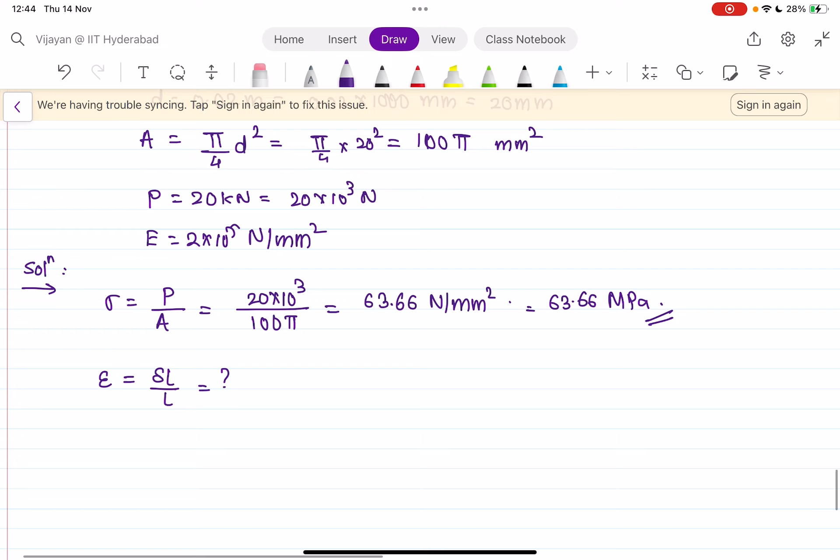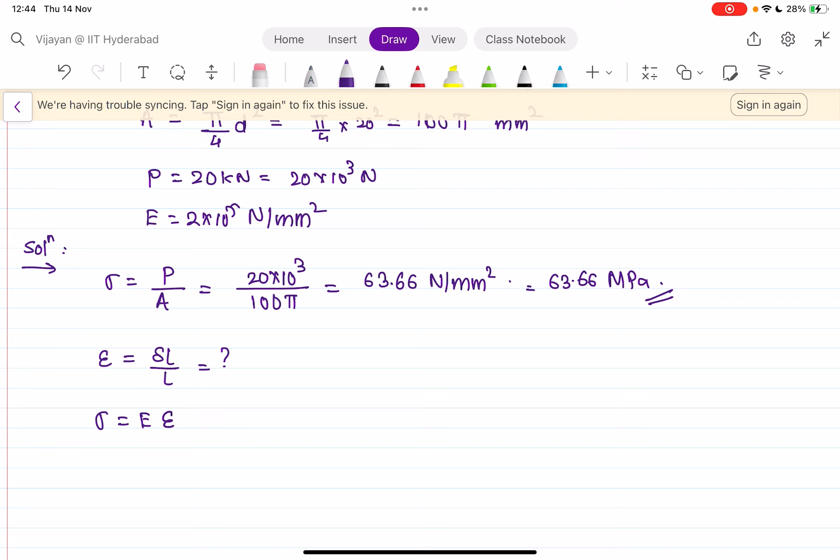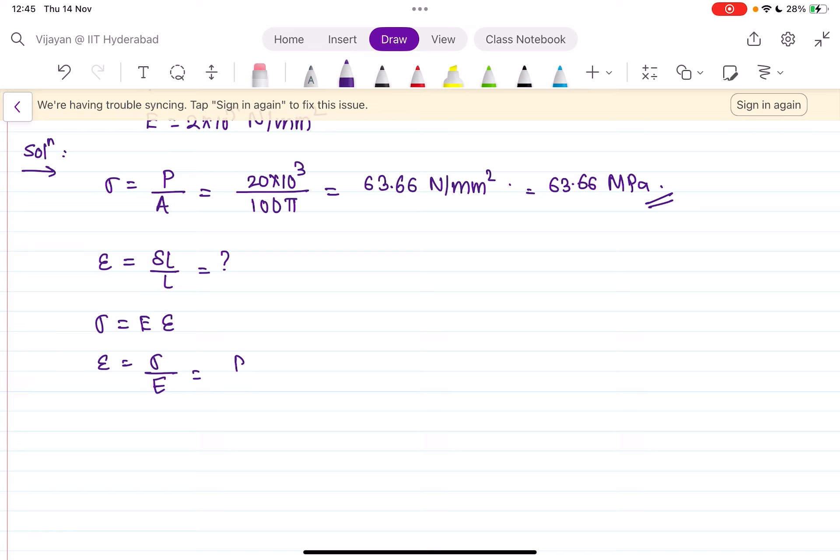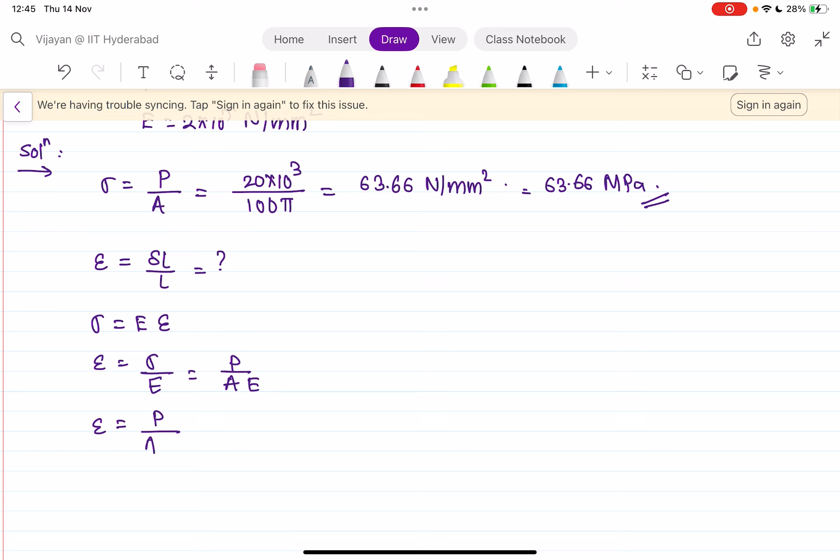So how can we find out change in length? We know, see, stress is equal to modulus of elasticity into strain. From here we derive the formula for delta L and remember it. What is your strain? Strain is nothing but sigma, that is stress, by modulus of elasticity. What is stress? Axial force upon area, and your E. Okay, so that means strain is nothing but P upon AE. Strain can be written as delta L upon L, that is equal to P by AE.

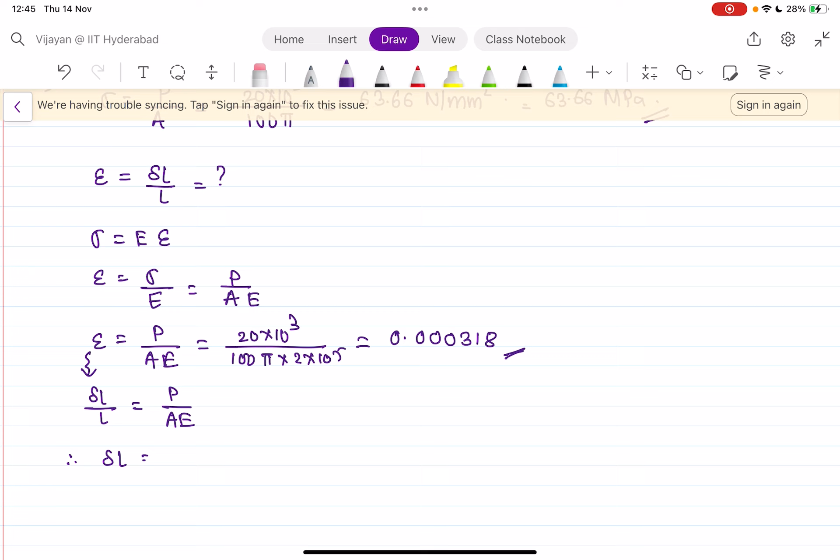From here you can find strain, that is 20 × 10³ upon 100 pi into 2 × 10⁵, and you'll get the answer as 0.000318. Strain will not have any unit, because it is nothing but length upon length. So to get the formula for delta L, we write strain as delta L upon L, change in length upon original length. So therefore delta L is equal to PL upon AE. This formula is very important; remember it as a standard formula.

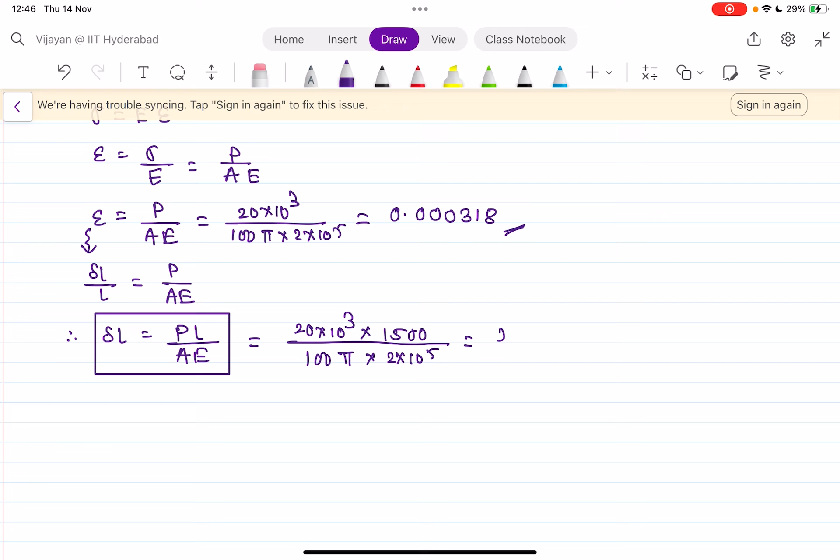So what is P? 20 × 10³ into L, which was 1.5 meter, that is 1500 mm, upon area 100 pi into E, 2 × 10⁵. If you solve this, you should get the answer as 0.478 mm. So that is your answer. That was question 1.

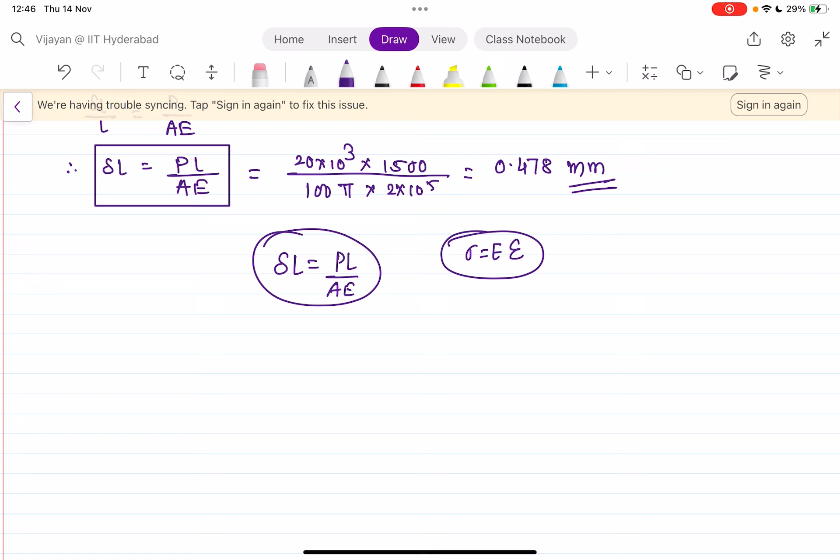So what did you learn here? Just the application: delta L is equal to PL upon AE. If you don't remember how it came, you know that stress is directly proportional to strain, therefore stress is equal to modulus of elasticity into strain. From this formula we can derive it. Okay, let us go on to the next problem, question number 2.

Find the minimum diameter of steel bar which is used to carry a load of 4000 Newton if the stress in the bar should not exceed 95 Newton per mm square.

Okay, so what is given? You can read the question again. Find the minimum diameter of steel bar which is used to carry a load of 4000 Newton. So P is given: P is 4000 Newton. Then the stress in the bar does not exceed 95 Newton per mm square.

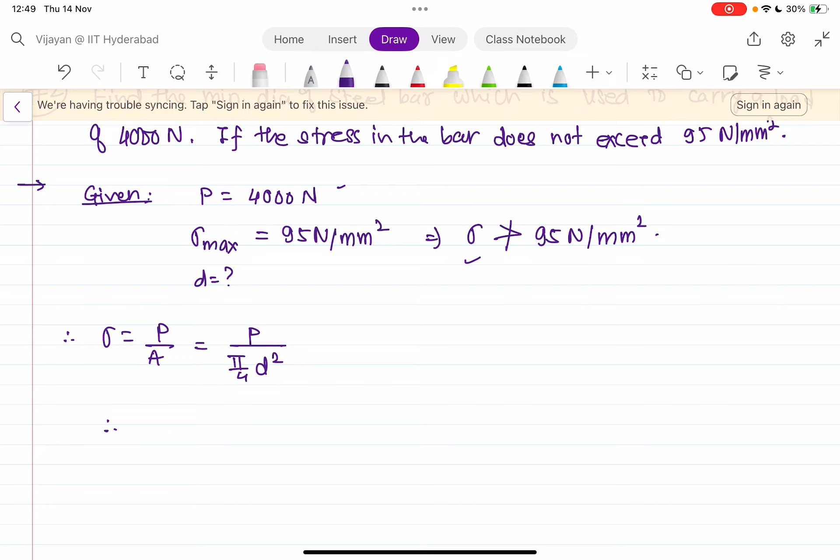So d square, we can write that d square is equal to P by pi by 4 into sigma, right? So we can write this as 4P upon pi into sigma. P is 4000 Newton upon pi into the maximum stress allowed, 95. Therefore if you solve this, you will get d square is equal to 53.61. Therefore d is equal to under root of 53.61, which is 7.32 mm.

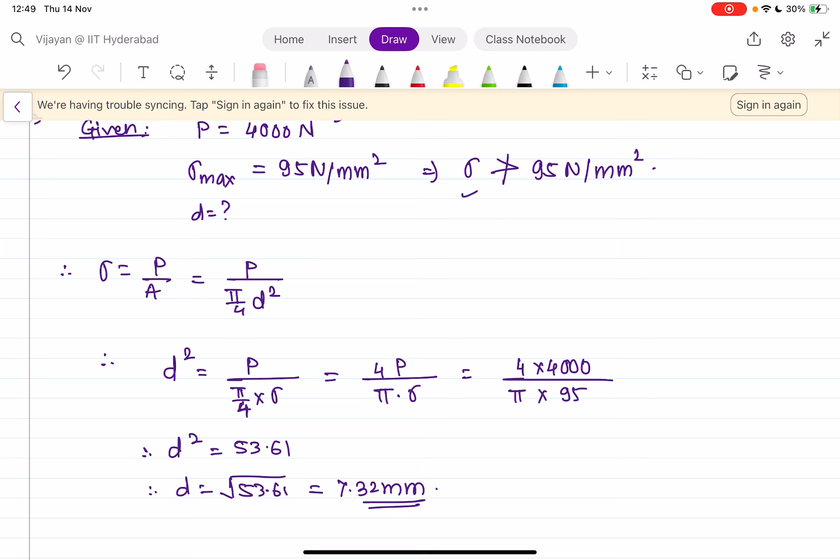Okay, so this should be your minimum diameter so the stress does not exceed 95 Newton per mm square. Let us go to a third example.

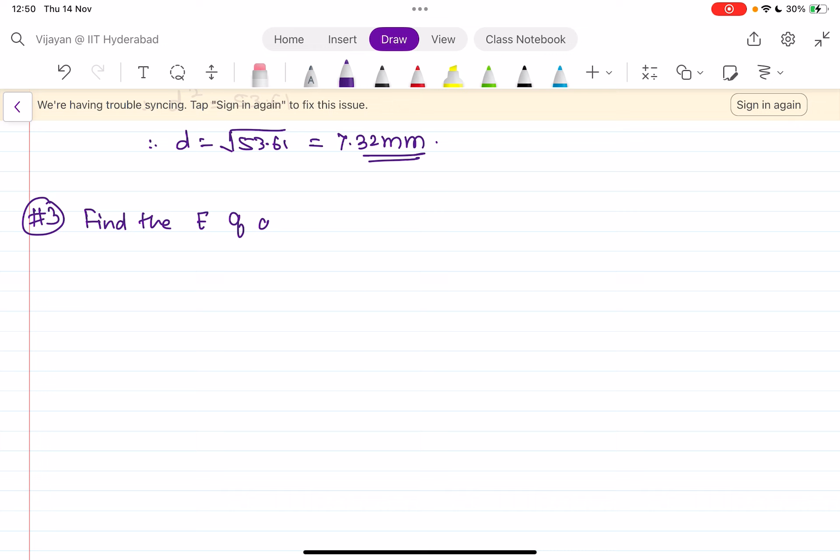Find the Young's modulus E of a brass rod of length 250 mm and diameter 25 mm, which is subjected to a tensile load of 50 kilonewton when the extension of rod is 0.3 mm. So what is your given data?

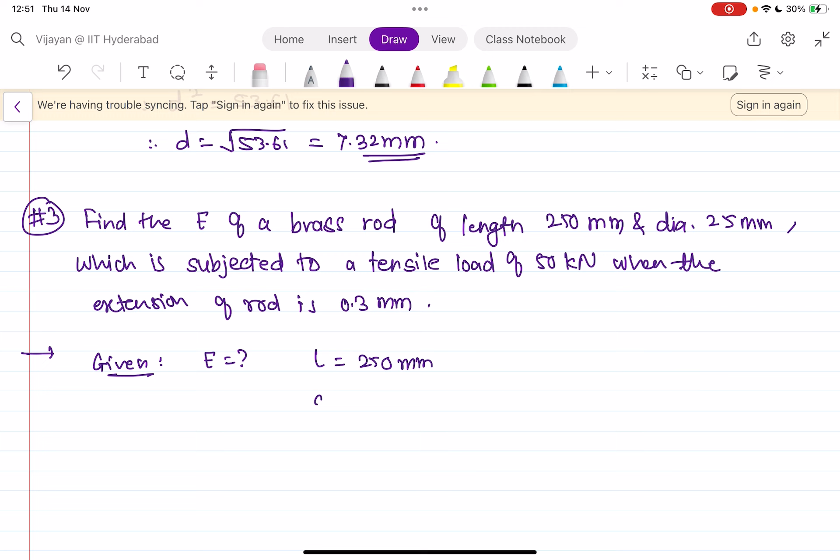Again it revolves around the same things. We have to find E. Given length is equal to 250 mm and the diameter of the bar is 25 mm. The tensile load, that is P, is equal to 50 kilonewton, and the extension, that is delta L, is 0.3 mm. So what you can find from this is area.

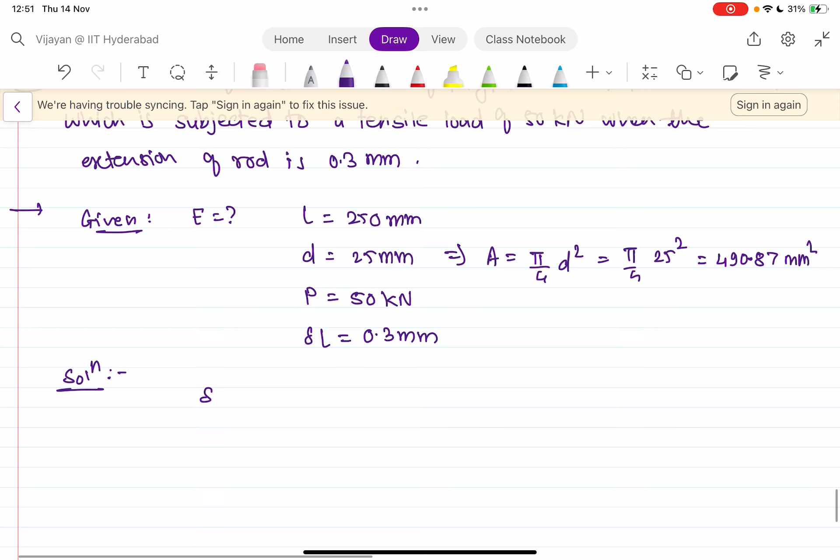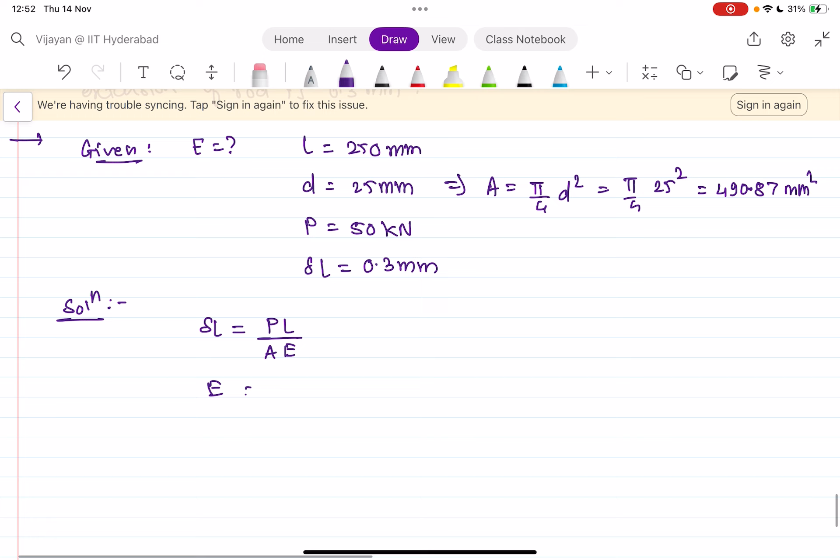Area is pi by 4 d square, because it is a brass rod, a circular rod. So pi by 4 into 25 square, which is 490.87 mm square. Now you can solve it. The formula for delta L is PL upon AE. We want to find E. E is nothing but PL upon A into delta L.

So P is 50 into 10 to the power 3. L is equal to 250 mm. Everything should be in newtons and mm. Area is 490.87 into delta L, 0.3 mm. If you solve this one, you should get 84882.64 Newton per mm square.

Now you can write it as 84.882 into 10 to the power 3 Newton per mm square. This is Newton per mm square. If I multiply by 10 to the power minus 6 in the denominator, this becomes meter square, and this is Newton. So the 6 goes up, plus 3, that is 9.

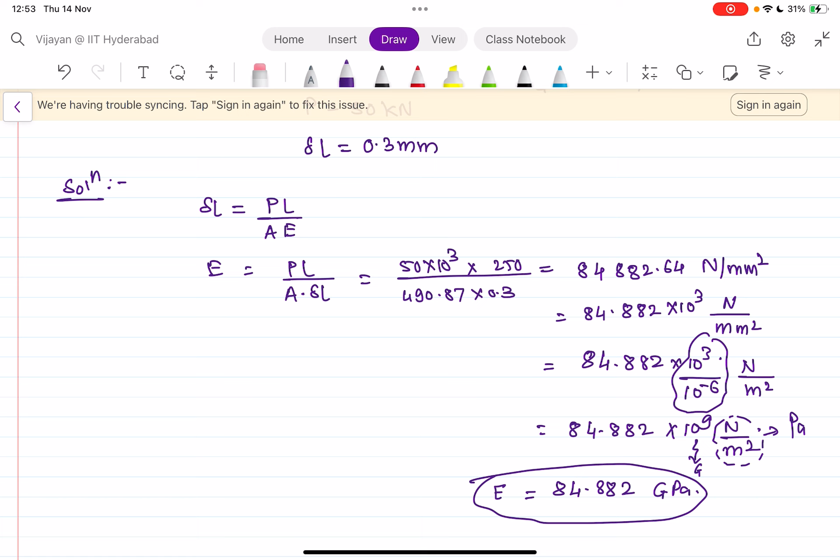So 84.882 into 10 to the power 9 Newton per meter square, and Newton per meter square is Pascal. 10 to the power 9 means giga, so E is 84.882 gigapascals. Okay, let us move on to our fourth problem quickly.

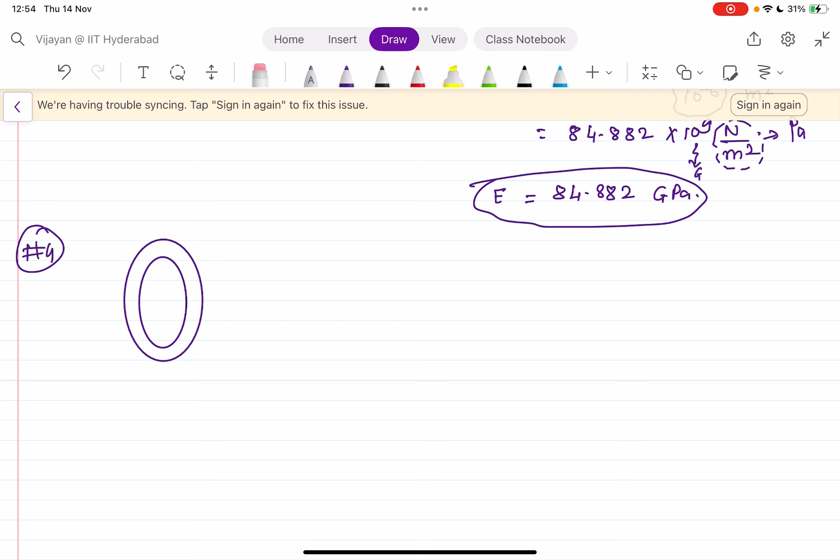So there is a section which looks something like this. Okay, and this is the one side we are seeing. This is a rod, this is a hollow section. You can say it is a pipe like section.

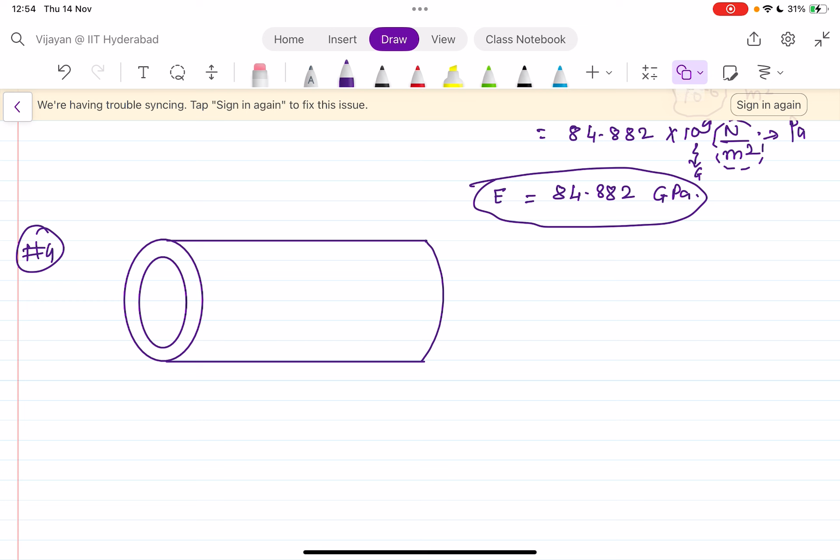It is a pipe-like section. Okay, what is happening on this? We are applying some force P from both the sides, a tensile force P, which is equal to 1.9 meganewton. What is meganewton? It is 10 to the power 6 newton. That means 1.9 into 10 to the power 6 newton.

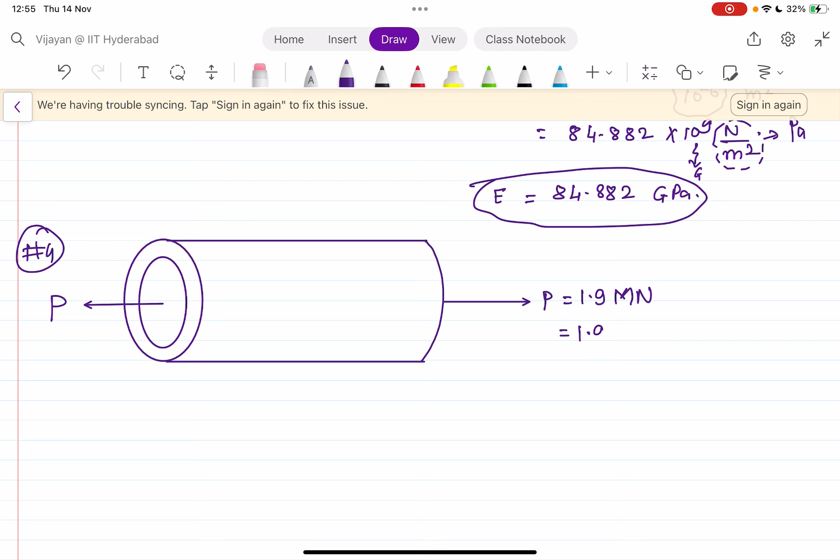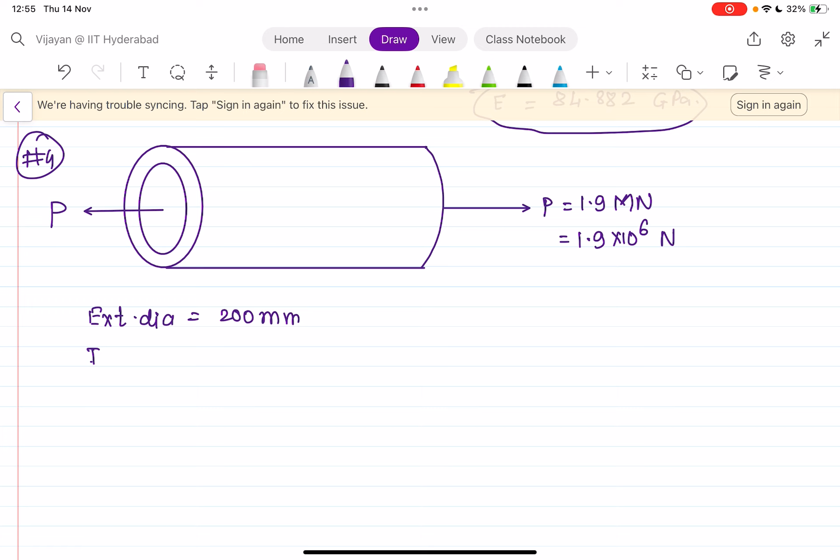Nothing else. What is the external diameter? The external diameter is 200 mm. What is the internal diameter? Internal diameter is what we have to find. Okay, and they have given that the working stress for this bar, that is sigma, is 120 newton per mm square, and so what we have to find is the d.

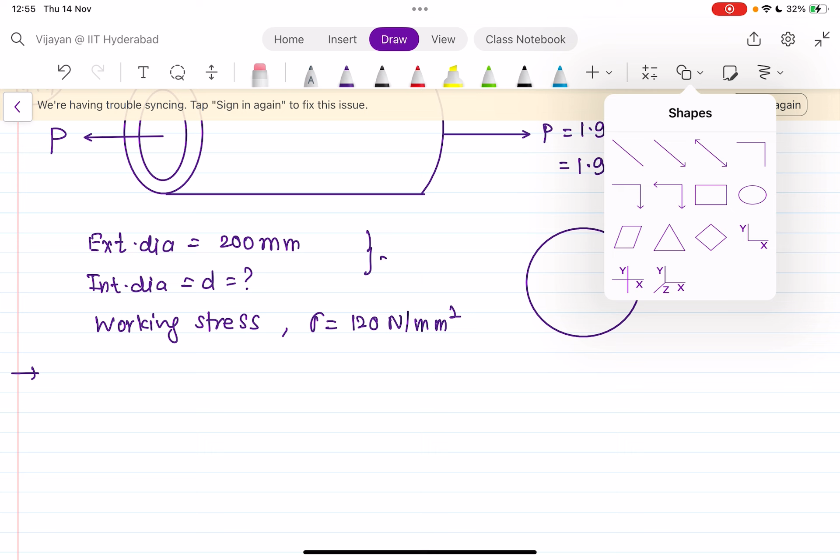Okay, so the stress they have given. So what will be the area of this hollow section? Let me draw the cross section here. If your cross section looks something like this, and this is your outer diameter, that is capital D, and your inner diameter, let us call it small d. So what will be the area? The area will be equal to pi by 4 into external diameter square minus internal diameter square.

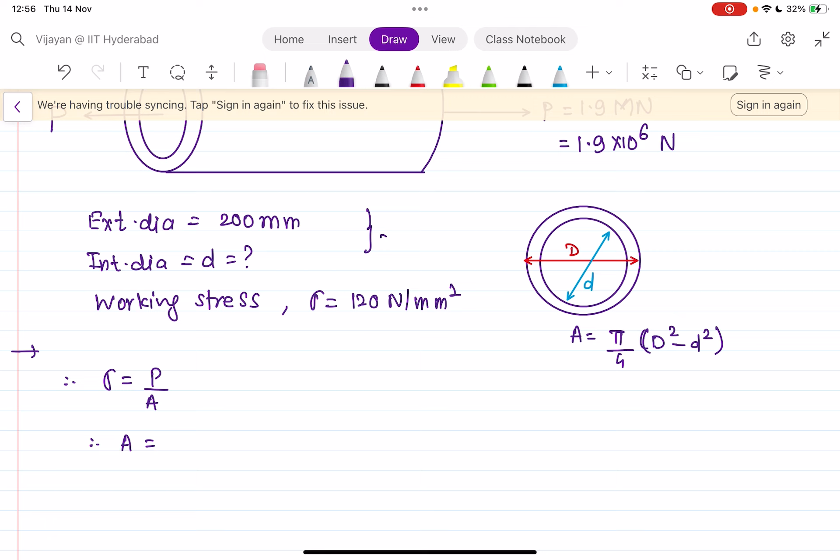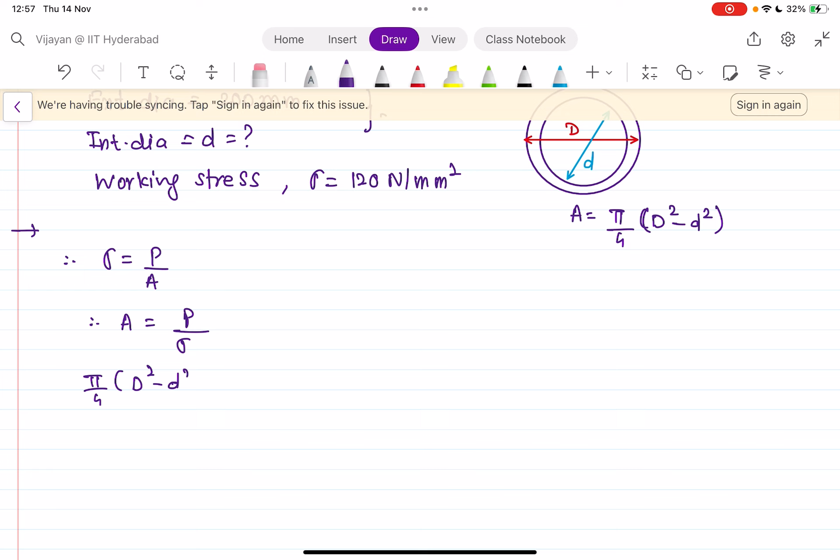Sigma is nothing but force upon area. What we want to find is internal diameter, so let us take area on one side and P and sigma on the other side. Pi by 4 into capital D square minus small d square is equal to P upon sigma. Let us put in all the values. Pi by 4 into 200 square minus small d square is equal to 1.9 into 10 to the power 6 newtons upon 120 newton per mm square. If you solve this, you will get the answer for d.

So 200 square minus d square is equal to, if pi by 4 goes there and you solve that, something like 20159.626, and therefore d square is equal to 19840.37, and this will give you d as 140.86 mm. So that is your answer. The internal diameter should be 140.86 mm. So this was about some of the very simple problems in this chapter.

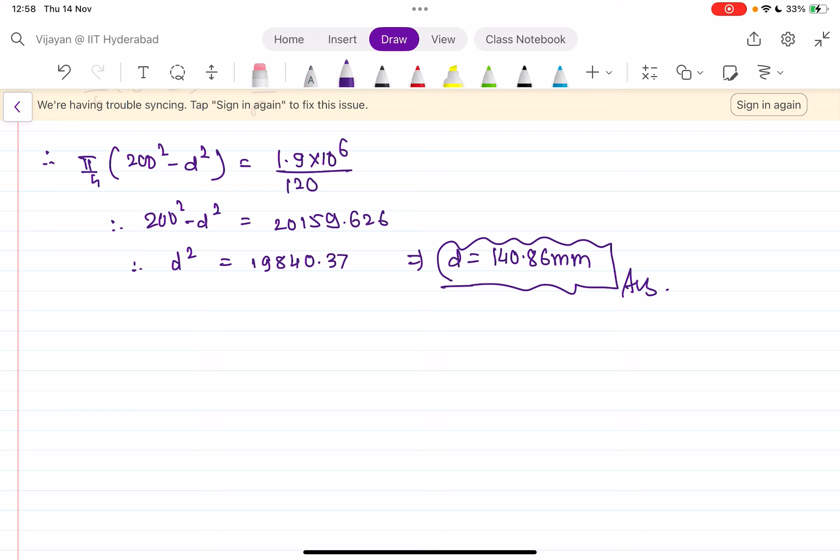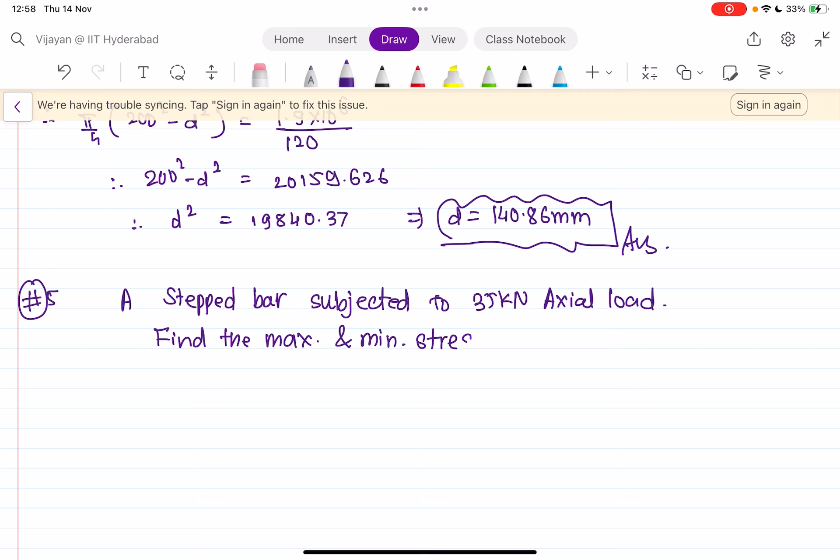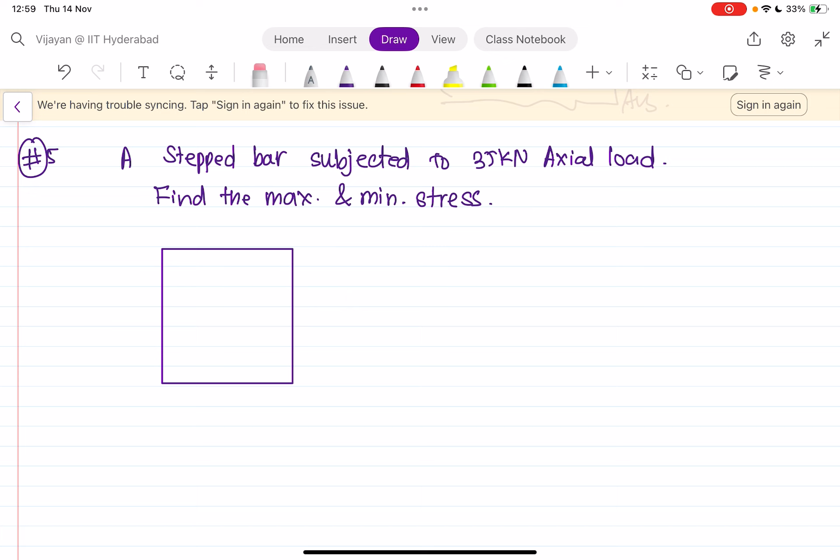Let us try now the varying sections problem, bars in a series, and let us look at question number 5. A stepped bar is subjected to 35 kilonewton axial load. Find the maximum and minimum stress in the section. So how does the section look? Let me show you. This is the section. A stepped bar, we call it a varying section. It is something like this, and this part is fixed.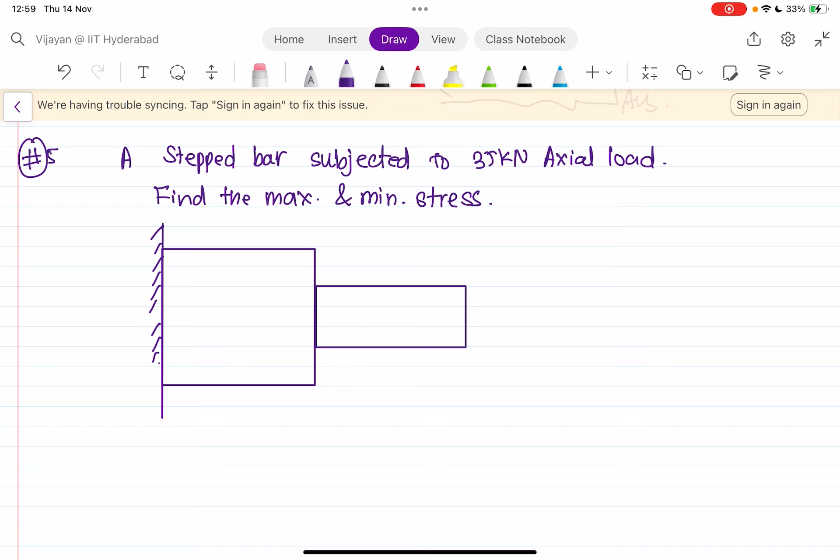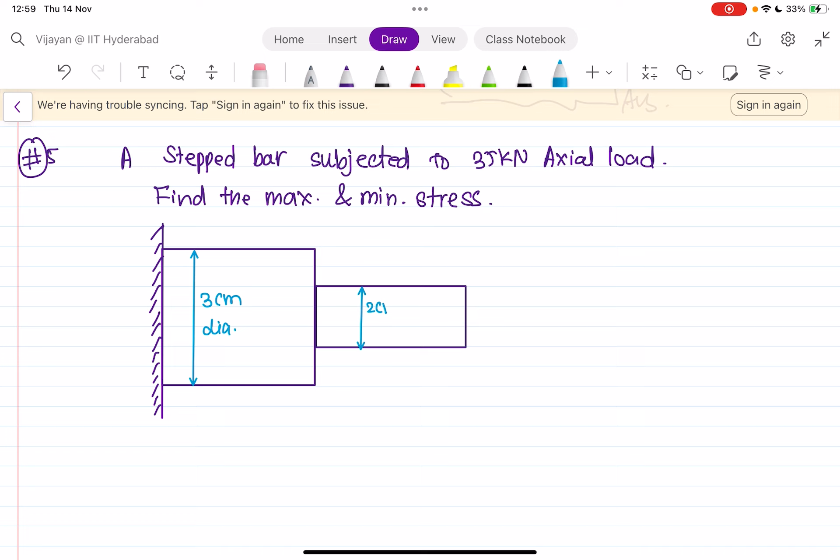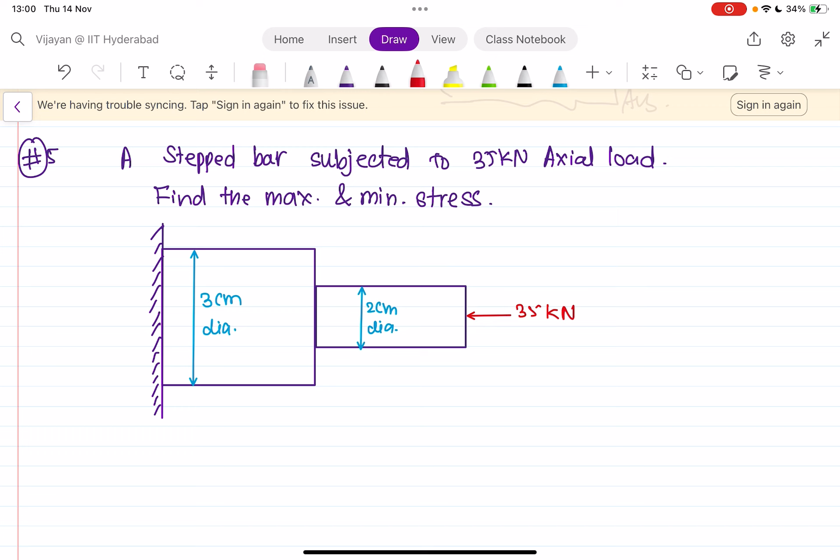This part is fixed. So the diameter of this bar is 3 centimeter, and this one is 2 centimeter diameter. The diagram is not to scale. Which force is applied on this? The force applied is compressive force, 35 kilonewton of compressive force. So what is the given data? We have to find the maximum and minimum stress. So let us look at the solution.

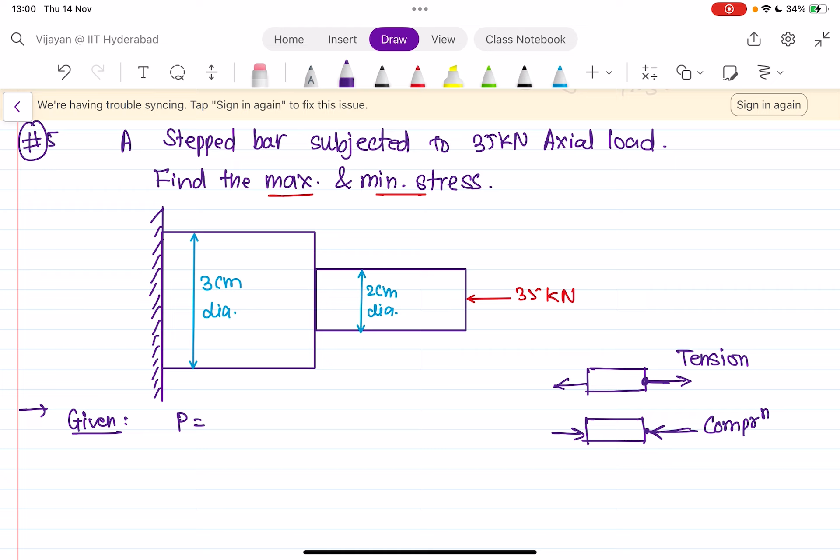First, what is given? P, and this force is compressive or tensile. See, if you are applying a force away from the section, that is tension, and if the force is going towards the section, that is compression. Here the force is going towards the section, and we denote tension by plus sign and compression by negative sign. This is purely our convention. You can assume compression as positive and tension as negative.

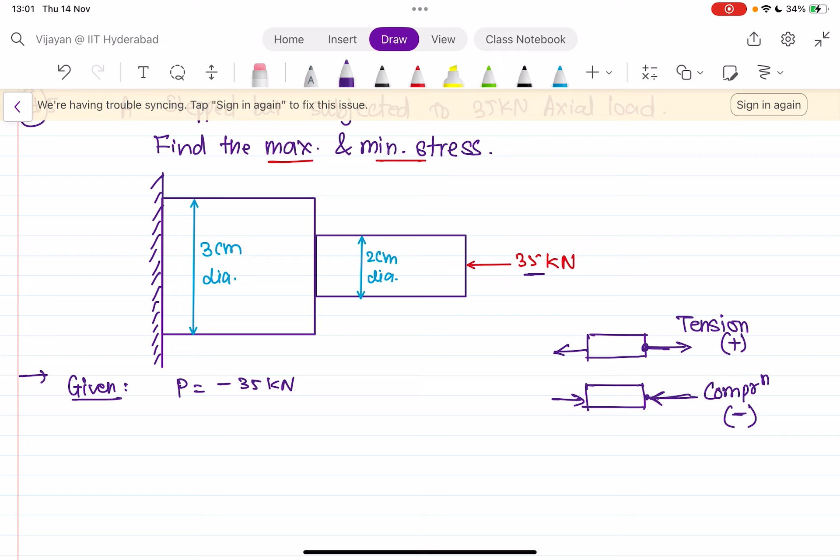Diameter is given, diameter 1, let us call this as 1 and this as 2. So diameter 1 is 3 centimeter, that is nothing but 30 mm, right? तो इसका एरिया we can find A1 is equal to pi by 4 D1 square. If you solve it, you will get the area as 225 pi. D2 will be 2 centimeter, that is 20 mm.

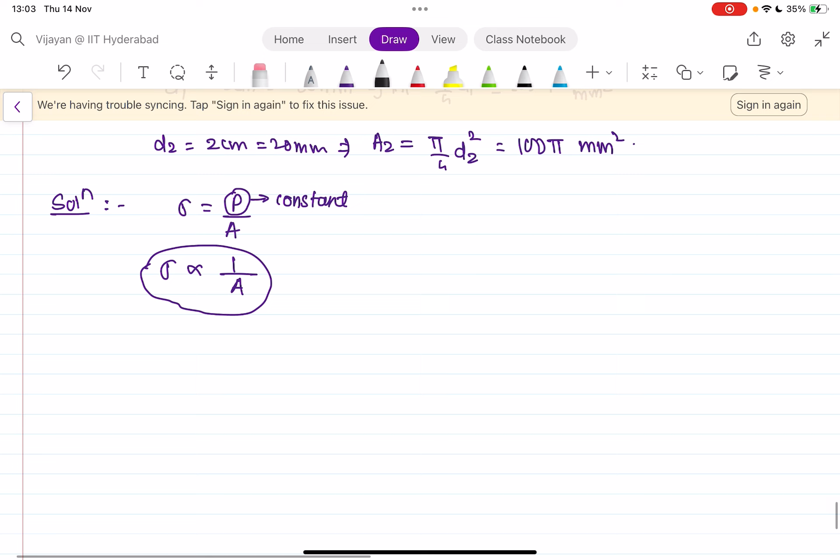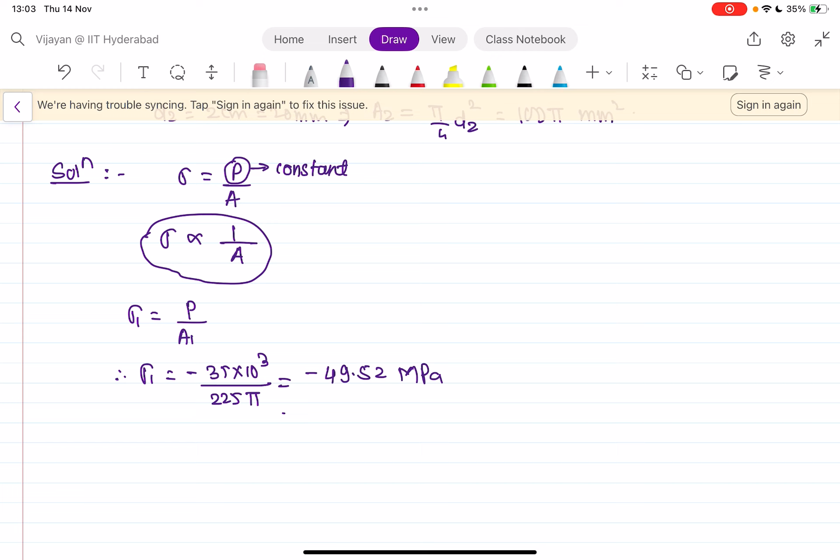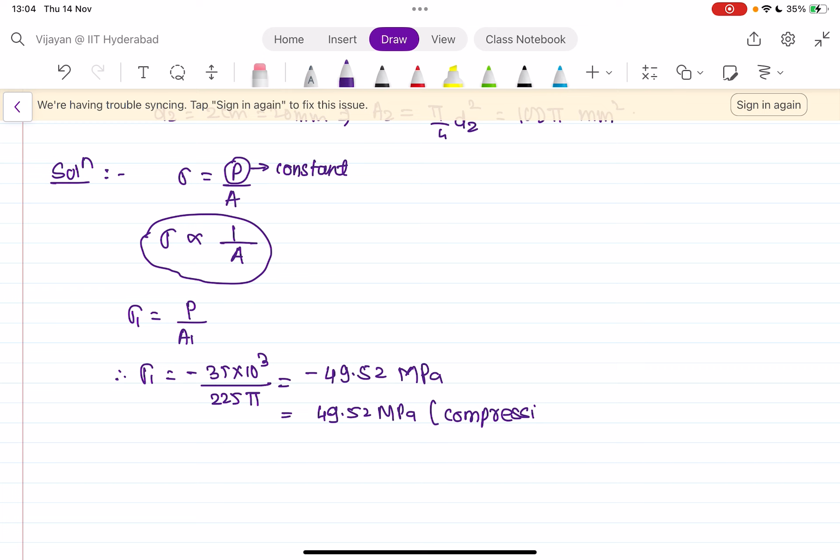माइनस 35 इंटू 10 टू द पावर 3 अपॉन एरिया वॉज 225 पाई। So if we solve this, it will come out to be as 49.52 Newton per mm square. Newton per mm square मतलब MPa. But you can write why this is minus, because the stress is compressive stress. So we can write 49.52 MPa and in bracket we can write compressive stress. Okay. So and sigma 2 if you find, that is P upon A2.

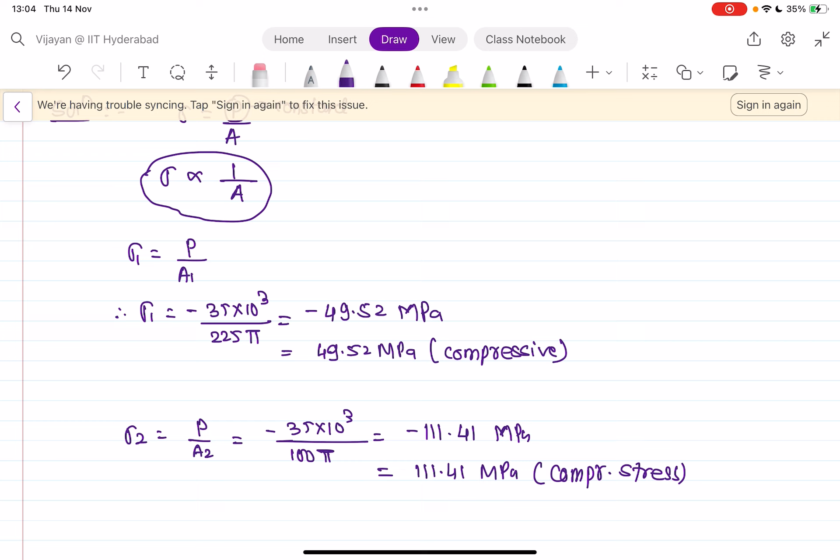Which stress is greater, 49.52 or 111.41? So this is minimum stress, this is maximum stress. Okay, that is maximum stress and this one is minimum stress. तो what is your conclusion?

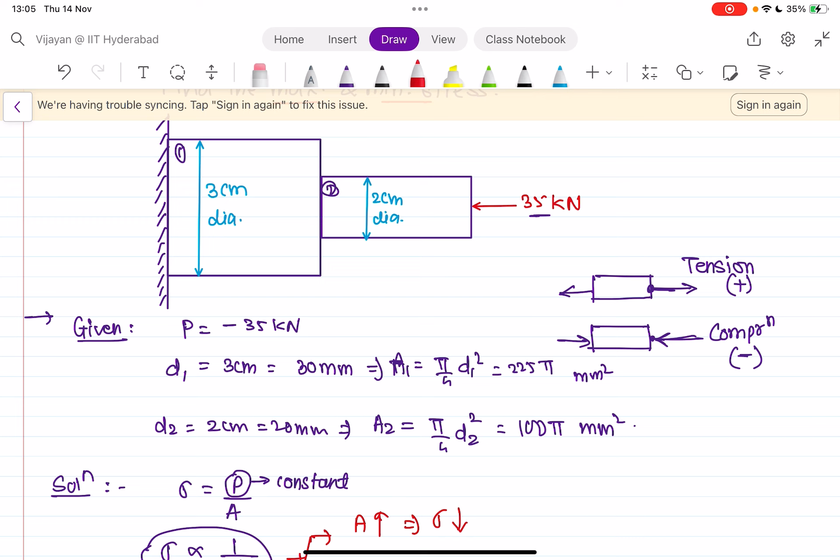अगर area is inversely proportional, मतलब if area is more you should get stress less, if area is less you should get more stress. मतलब smaller section, can you now tell me without seeing the answer, larger section में कम stress रहेगा, smaller section में ज़्यादा stress रहेगा। तो sigma 1 should be lesser, sigma 1 is lesser, sigma minimum, sigma 2 is more, that is sigma maximum. Okay, that is your answer. So I think that is enough for this one. So we can stop here.

Next lecture में what we are going to see is the bars with varying sections.